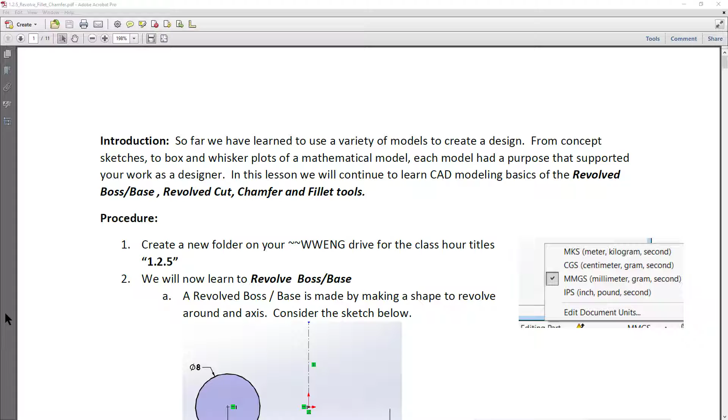Today we're going to work on learning how to do a few new tools with SolidWorks. What we're going to work on is learning how to do a Revolve boss base, apply a chamfer, and a fillet tool. So first, before we get started, you want to go to the LMS.

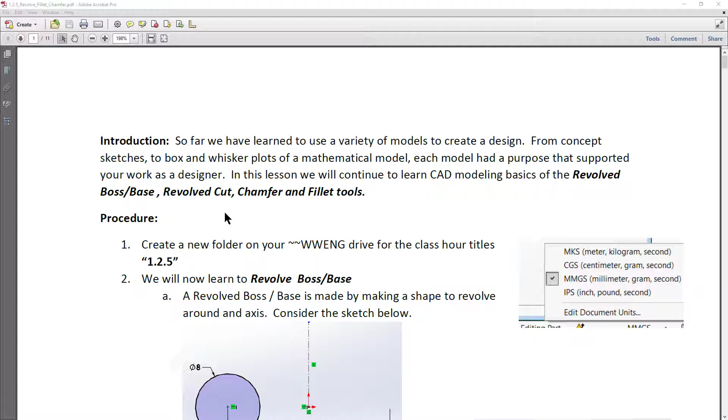And at the LMS, you're going to have the instruction sheet. Now you can either view it in the LMS itself, or you can download it using the PDF link where my cursor is at. I chose to download that, and I happen to have it sitting right here on my desktop. Very first thing we want to do is we want to go ahead and visit your Westwood Engineering hour folder.

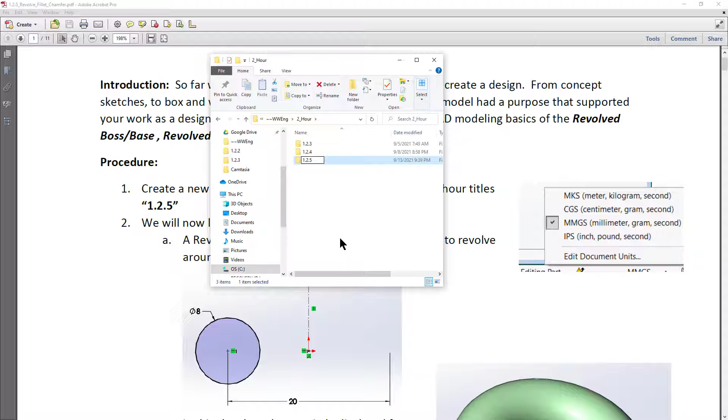I happen to be in second hour, so I'm going to go ahead and make myself a new folder. So I'll go in here and right click, new folder. I'm going to name this folder 1.2.5. That's just where I'm going to store my part for this exercise and subsequent exercises that support this. So now I've got my folder made.

I want to go ahead and start up SolidWorks, and I've got SolidWorks running in another window. Let me pull it up. All right, SolidWorks is running now, and we're going to go ahead and make a Revolve boss base. And this is just another way of extruding material out, except we're going to extrude that material out in a circular pattern, or a revolve.

And when we look at the essence of what a revolve is, it's made up by a sketch in any plane with a line in that plane that we're going to revolve around. Now in this instance, I've got an 8mm circle revolving around this center line where my cursor is flashing. And it is revolving around at a 20mm

diameter. You'll see that when I revolve that around, I make this fancy little green donut. I've colored it to give a little better depiction of it. Essentially, a revolved boss base is a 2D shape that's revolved around up to 360 degrees around an axis.

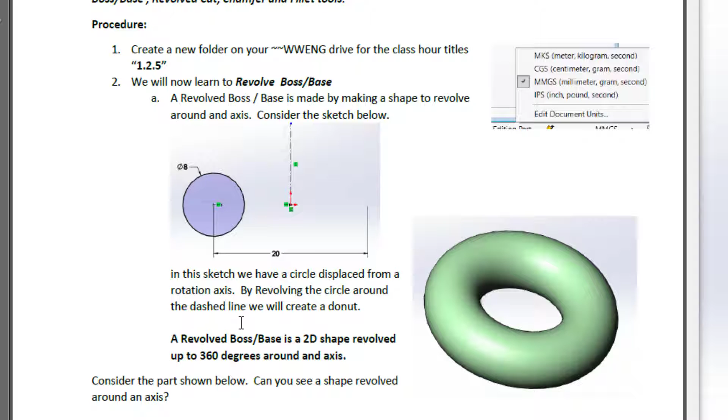So if we take a look at our part, and we've got our part drawing up in the document, you'll see that we're going to make this little doohickey here. And it's basically a round object with some smooth corners and a square object on the top. So we're going to make this part using a revolve boss base, 2 fillets, and a chamfer, and an extrusion on top. Forgot to put that in the document.

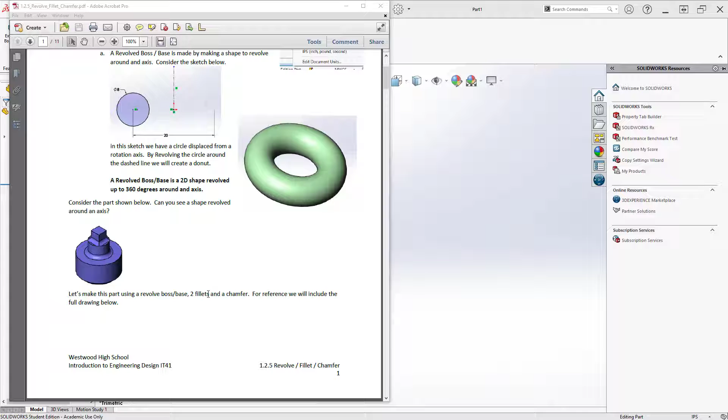So the full drawing looks like this for the part. And we'll reference back to this in particular points. Now, a couple of important things about this drawing. This drawing shows a front view where my cursor is flashing. It shows several detailed views, A, B, and C. And you'll notice that detail A, B, and C also appear.

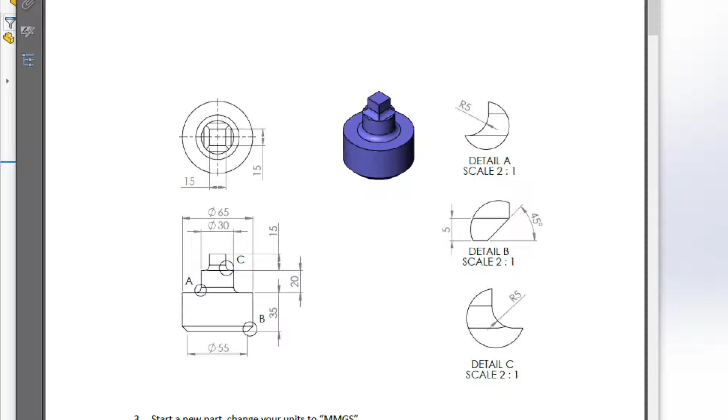Now, we're going to go ahead and start this out by making this a millimeter part. So that's the first thing I want you to do. So let's go over here and start, and we're going to go down in the lower right corner where it says IPS. Click on that, select MMGS. We're now in millimeters. Now, in any plane you would like, we're going to start a new sketch.

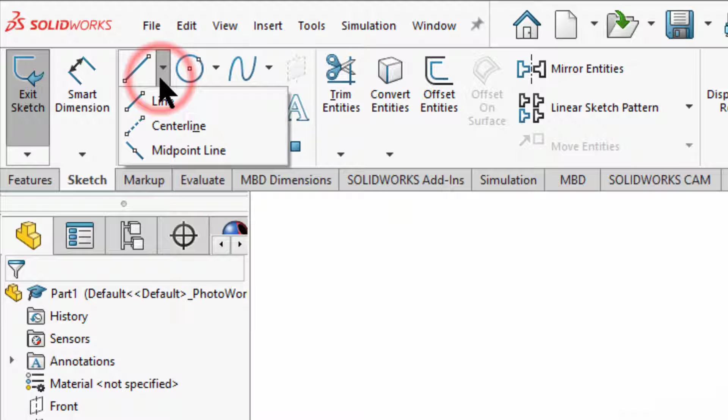I'll go ahead and go Sketch tab, Sketch button. I want to sketch in the front plane for this particular exercise. And the first thing I want to do is I want to take what's called a center line. And a center line is found on your line tool, and right here, center line. And what that does is it draws a geometry that I can build around, but it won't be included in the part that extrudes, cuts, or revolves.

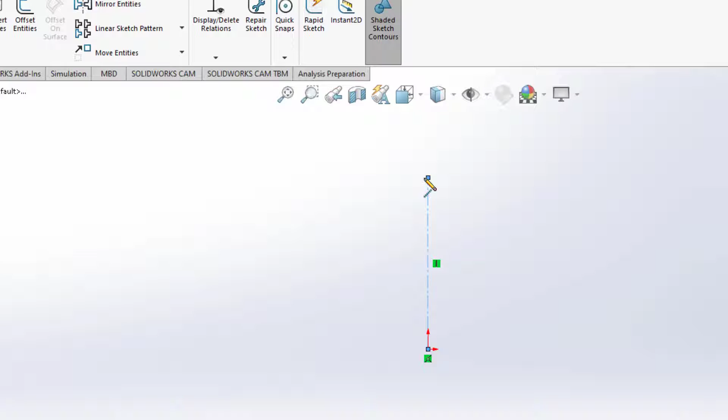So I'm going to start at the origin, click once, release, pull it up, drop it when I get a vertical reference. I can hit escape to get out of that line tool. So there's my revolve axis that we're going to use. And you'll notice that our part here revolves around, and I'm going to make these 2 shapes right here. And the shape that I'm going to make are basically 2 little rectangles.

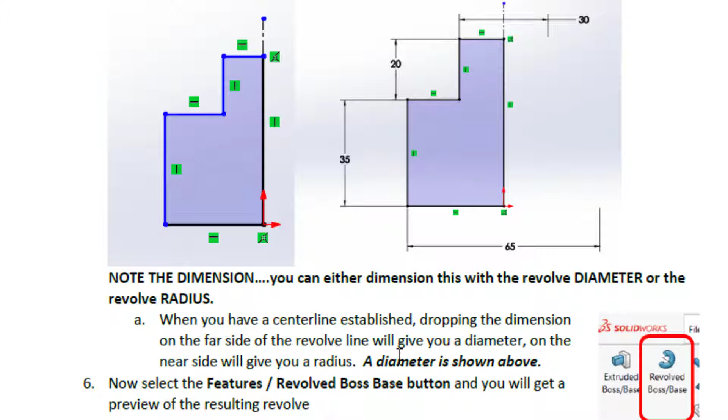So we're going to go ahead and draw this shape right here. And I just want to make that shape approximately correct. I don't need to make it dimensionally correct just yet. So let's start. I'll grab my line tool, start at the origin, and I'm going to bring it up. I'll come just a little bit less than my construction line is.

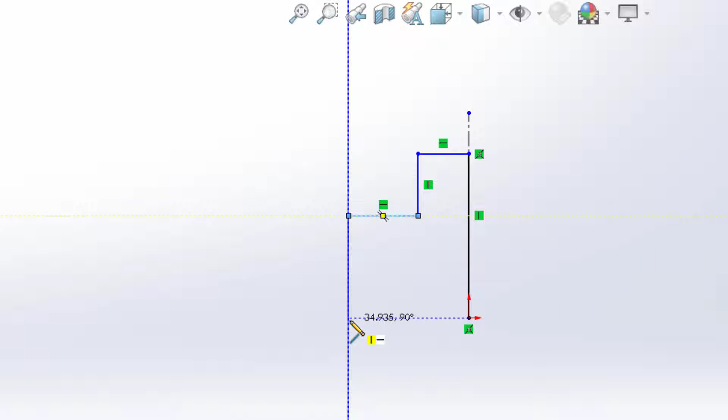Drop it, pull it horizontally out. Come vertically down, horizontally out, vertically down until I'm level with my origin. Click, and come over and meet my origin. When I click, it turns gray. It's a closed body. I can exit my line tool.

Now I want to grab my Smart Dimension tool, and I want to dimension this. Now the dimensions that I want to use here, you'll see, I want to make this thing so that it's basically 65 millimeters in diameter when it revolves.

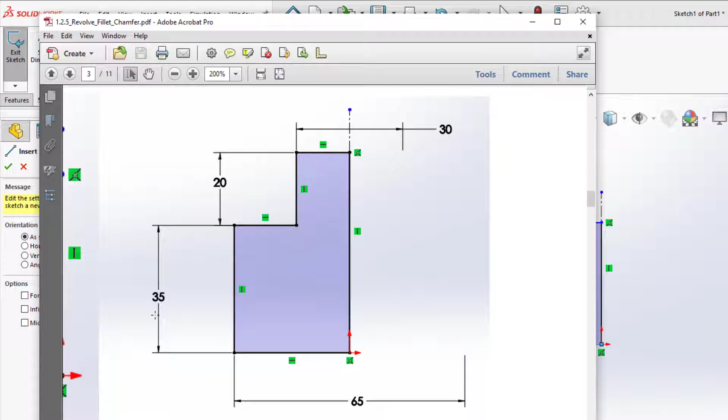30 millimeters in diameter when it revolves. 35 millimeters tall, 20 millimeters tall. So let's grab our dimension tool. And this is a unique attribute to the revolve function. So I grab my smart dimension, and I'm going to click on the outside line here first. Click and release. And now I come up to my revolve line.

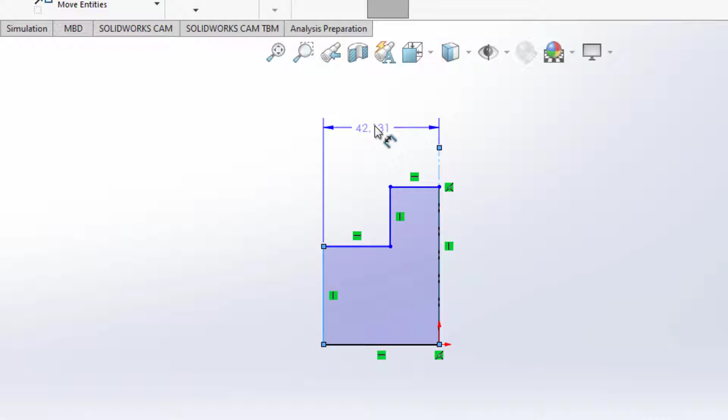Click and release. Now you'll see if I stay on the left-hand side of that line, I get a radius. If I go to the right-hand side of the line, that radius is converted into a diameter. So I go to the right-hand side, click and drop it. I want to dimension this at 65. Similarly, I'll do the same thing for the top diameter. This top diameter, I'm going to go ahead and dimension that at 30.

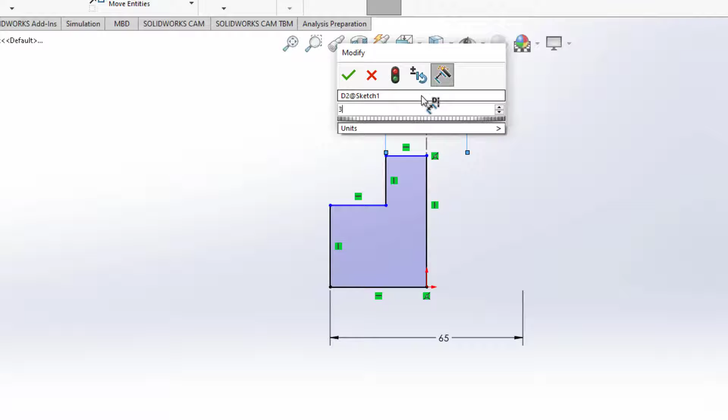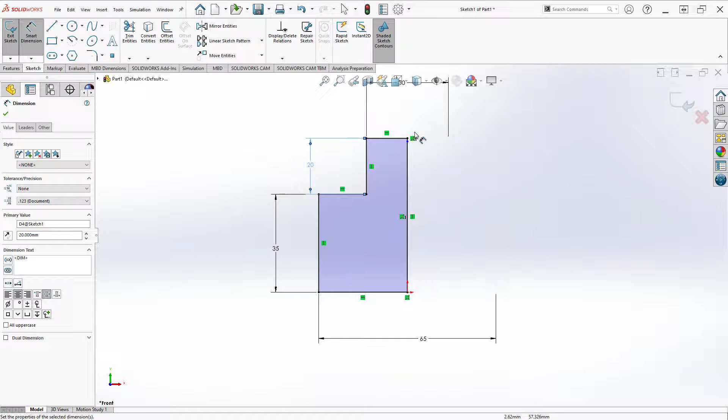I need some height of this first step. That happens to be 35. And my second step height here happens to be 20. You'll notice I'm fully dimensioned now and fully defined. And I can exit out of my sketch. Now, one thing to note here is I have dropped my reference line down below. So I kind of want to keep track of that, where that revolve line is.

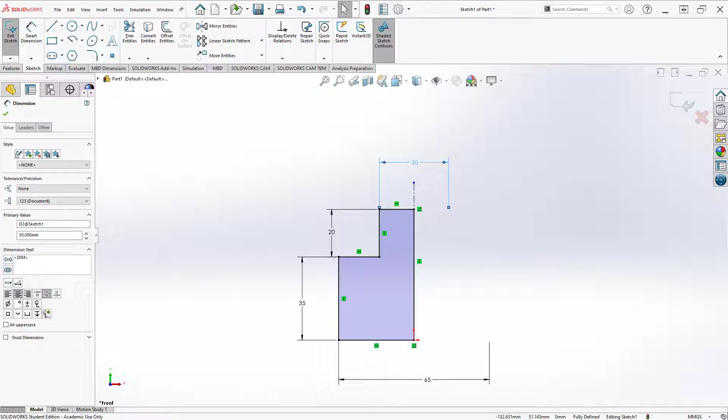Now, I could have dimensioned this with the radius. It doesn't really matter. I prefer diameter when I do revolves because it makes it a little clearer what the final size will be to me. All right, so now we're going to exit out of our sketch, but we're not going to close our sketch. We're just going to go out to the features and then hit the revolve boss base button. So I'm going to go features,

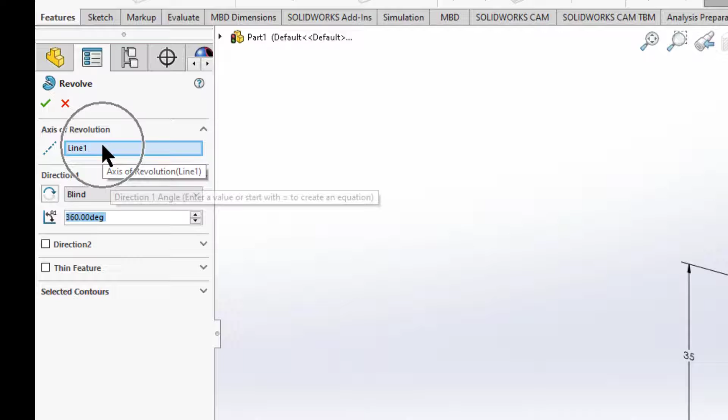revolve boss base. Now, because it has a reference line that looks like an axis of rotation, that construction line, and a closed body, it guesses pretty well that I'm going to do a revolve. Now, these boxes over here are different options, and I could choose a different point to revolve around. I'm going to keep it, though, the way it's selected. If it's not selected, I can clear it, and then I can choose it.

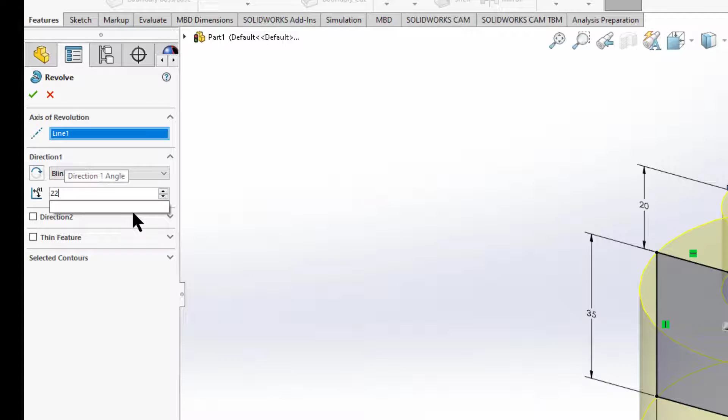I can go around in a couple different directions, so usually you're only going around in one direction. I can go anywhere from a non-zero number to 360 degrees. So let me show if I went like 225 degrees. You'll see that I got a pie-shaped object there in the revolve. But I really want it to be 360 degrees. Now, while I have it less than 360, you can see that I can change my direction of the revolve with this toggle. For our purposes, let's go 360 degrees.

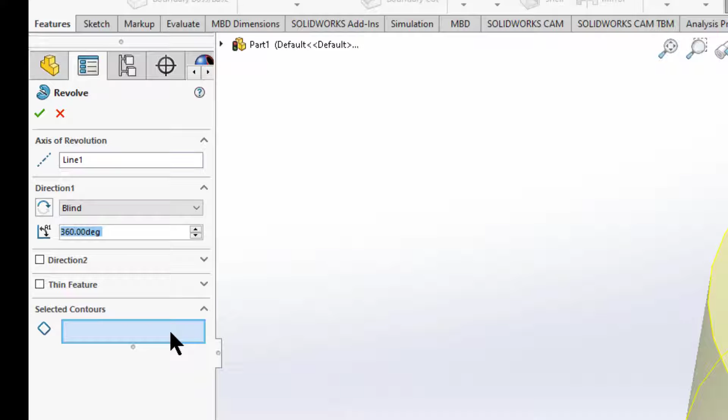A couple of other options here. I could go a second direction. I could also make it a thin feature, meaning it's not a closed body. And if I had multiple contours to my sketch, I could select all or part of the contours I wanted to revolve. But that looks pretty good to me. So let's go ahead and hit the green check mark and accept it. You'll see now I've got my body right there. So I've revolved. Let's hop back over here and see what's next.

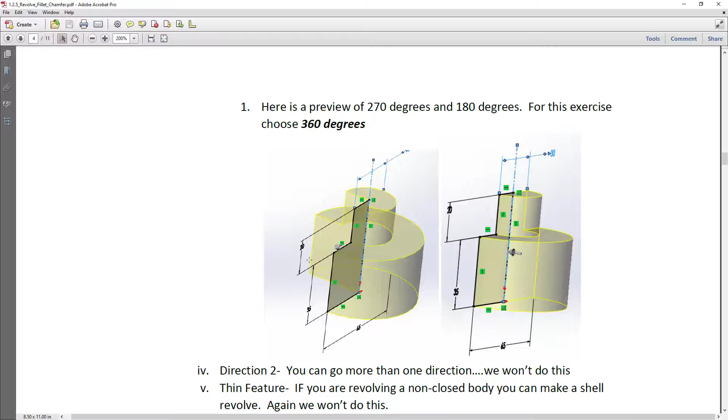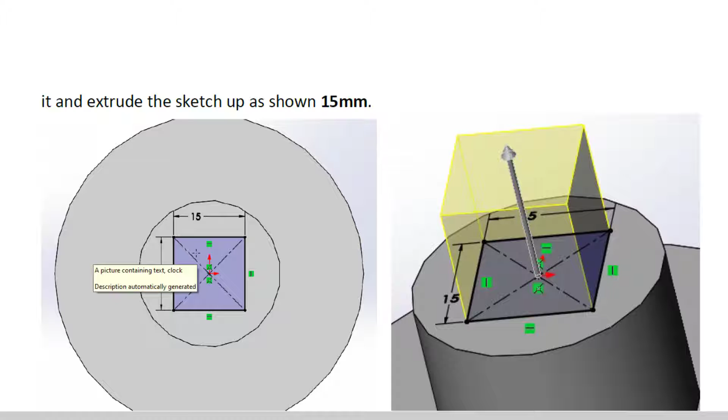So you'll see that after I've done my revolve, what I need to do now is add the little square nub on the top of my part, okay? This little square nub. And to do this, I'm going to use what's called a center rectangle, because you'll notice that I took advantage of symmetry and put the origin in the middle of the part. So that's advantageous to us. This cube is a cube, 15 millimeters by 15 millimeters by 15 millimeters tall. So let's go ahead and draw that.

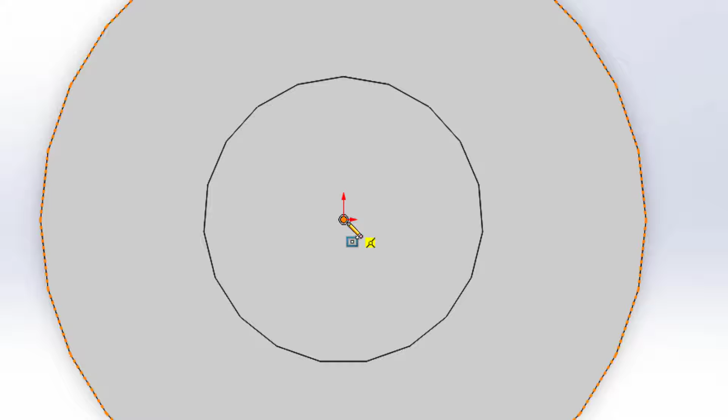I'm going to start a sketch, sketch tab, sketch button, click my top surface, and here I'm going to grab center rectangle. With that center rectangle, I want to come down and drop once on the middle of the circle, the origin, pull it out, and drop it.

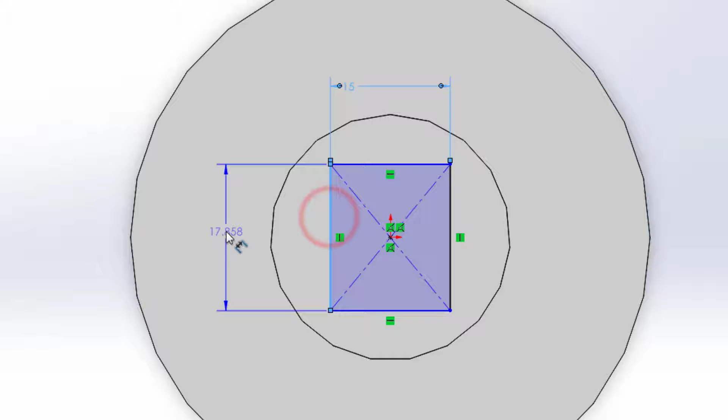Notice I don't want to touch any of these underlying entities and infer a size to it, because I'm going to dimension it. I want to make it 15 by 15. I am fully defined. I'm going to roll it off to the side, and I want to go ahead and go features and extrude that up.

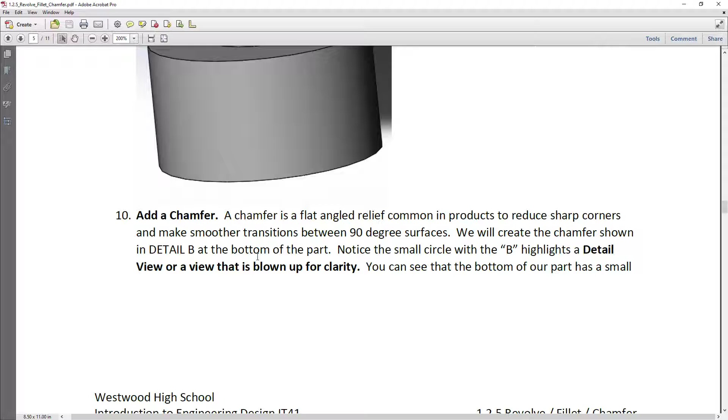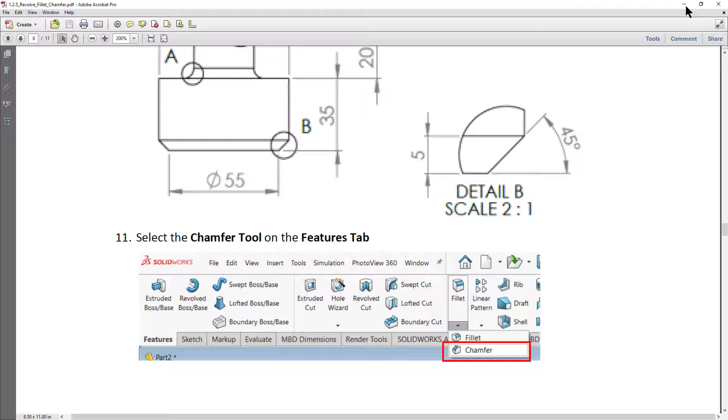And now we're looking at this, and what we really want to do is make a chamfer. A chamfer is this 45-degree relief down here at the bottom. That 45-degree relief is shown by the letter B in detail B. You'll see that it's 45 degrees and it's 5 millimeters. That's called a chamfer. Now we find the chamfer up here underneath the fillet button. If I click the drop down, I see chamfer. Select that.

Now a couple of important things. I want to be sure that I have tangent propagation on, and I want full preview. The first time you use it, you may not have any preview on. This will show me what I'm chamfering. Now the dimensions of our chamfer are 5 millimeters, and we're going to do it 45 degrees symmetric. So that's what this means, 45 degrees.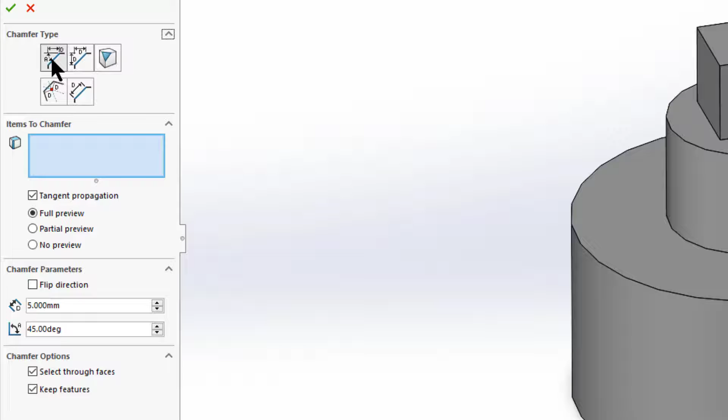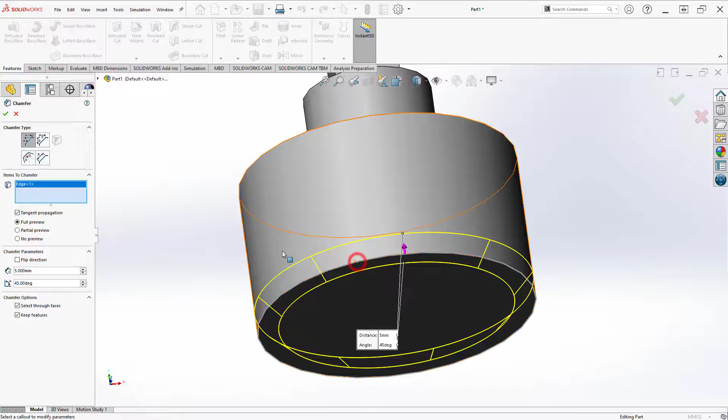All right, so the edge that we're going to apply the chamfer to is this lower edge down here. So I'm going to zoom in. When I highlight, it turns orange, and when I'm happy with it, I select it. Now see how it appears in the box, edge 1? I can click it again and it'll go away. So if I make a mistake, I can clear it that way. I can come over the box and clear my selections. But that's what I want.

There's my preview. Full preview will help you out a lot to envision what you're doing and be sure it looks right. Notice the data for it are down here in this box, and I can edit this data down here as well. But those are correct, so I'll leave it. Hit the check mark to accept it. Well, that was pretty easy. And you know what? A fillet is equally easy.

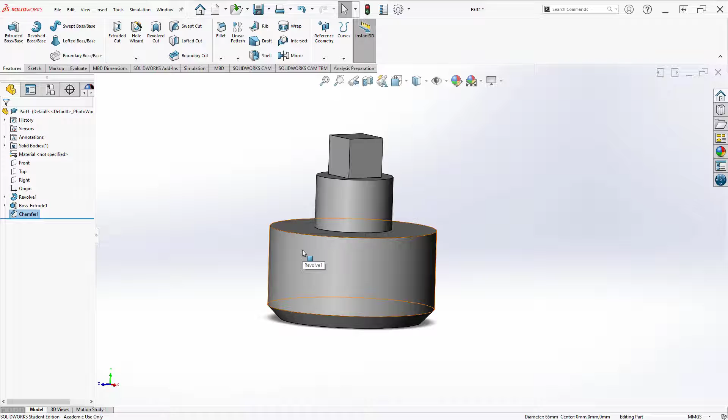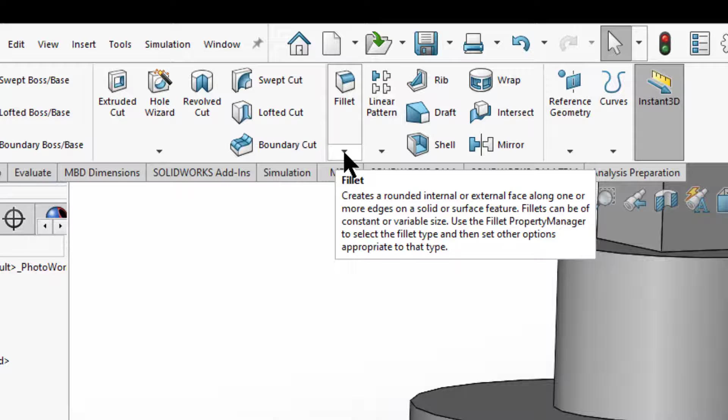So before we move on, remember that a chamfer is a straight angular line that helps ease transitions between two planar surfaces that meet perpendicular. Very common in manufacturing, very common just to avoid sharp edges and tight corners. Now, if I don't want an angled surface and I want a rounded surface, that's called a fillet. Same button, except I select fillet. Menu looks almost the same. I'm going to click on this first constant fillet size. I can change that. Tangent propagation, full preview.

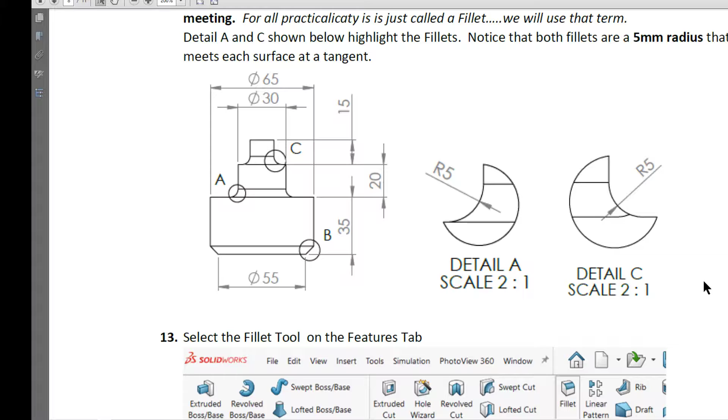Now my fillet for this one is 5 millimeters. And that is shown further on down our document, again in our details. You'll see detail A and C show fillets. They're 5 millimeters. The way we define a fillet is by its radius, and that radius becomes tangential to the two surfaces where it meets. So I'm going to choose my fillet tool, and these are the fillet options. First I want to be sure it's symmetric, 5 millimeters. It's very handy to keep tangent propagation selected and full preview.

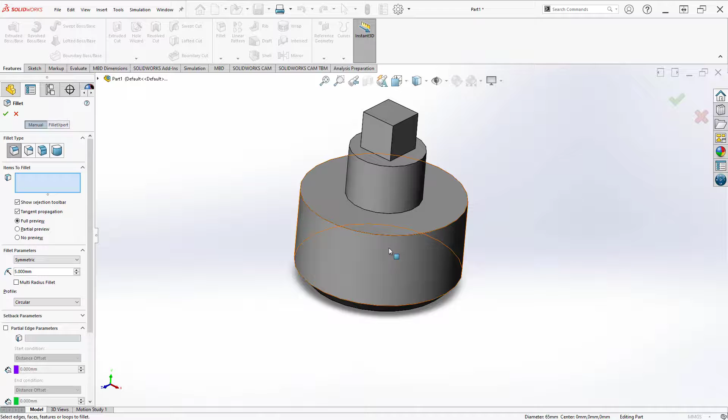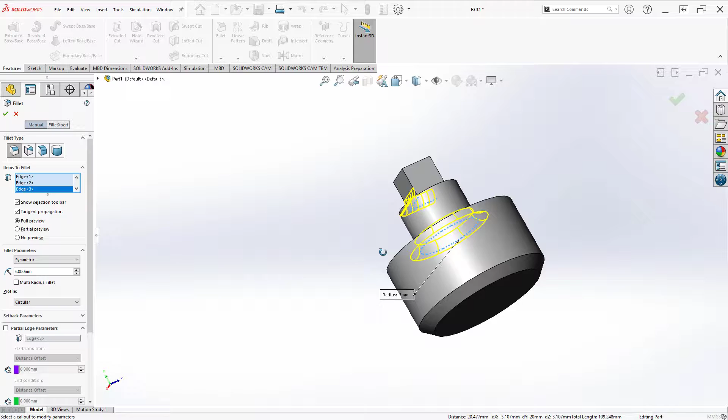Now you'll notice I can apply this fillet to more than one location. As I click on this edge, you'll see the fillet will show up. There's edge 1. Now I also want to do these top surfaces. So I'm going to click on the edge. And you'll see that it goes around that corner, but it doesn't wrap around. The reason is because these are not tangent edges. So I have to go around and select, and I'm holding my center wheel down and picking off each surface I want to fillet.

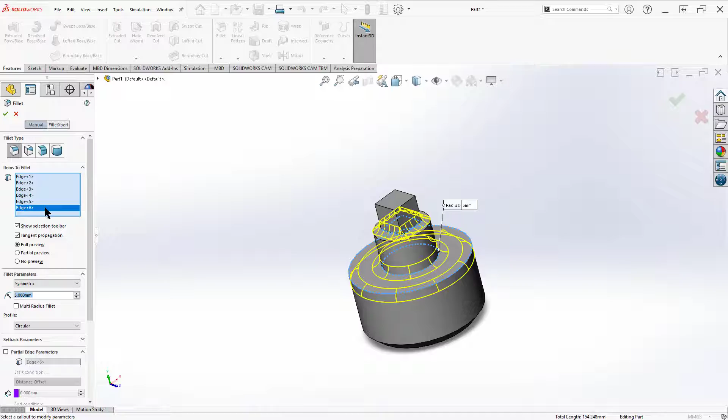Same thing, if I choose a fillet accidentally, let's just say I click here, oops, I didn't want that. All I've got to do is either come up and right click and delete it, or click it a second time. So I'll click it here, oops, I didn't want it, click it a second time, it goes away. Roll my model around, it looks like my fillet's correct. Again, I can change my variables, 5 millimeters, but that's correct, and then hit my check mark.

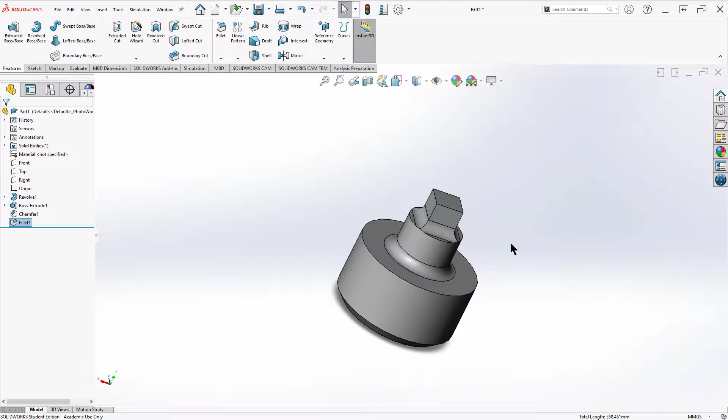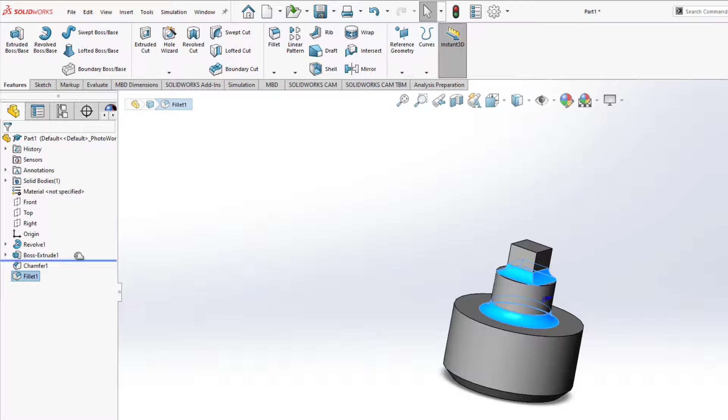And now I've made my part. You'll see that my part was made up of a revolve, a boss extrude, a chamfer, and a fillet. Now, while I've got your attention, let's take a quick look at our design tree over here in the rollback bar. I can roll this blue bar back by grabbing with the little fingers, and I can walk through my model, how it was made. Very handy to see how we constructed the model.

So we're going to save this part. File, save. I'm going to navigate over to second hour, 1.2.5, and save this as 1.2.5. Save it as a SOLIDWORKS part, and that's what you'll submit.